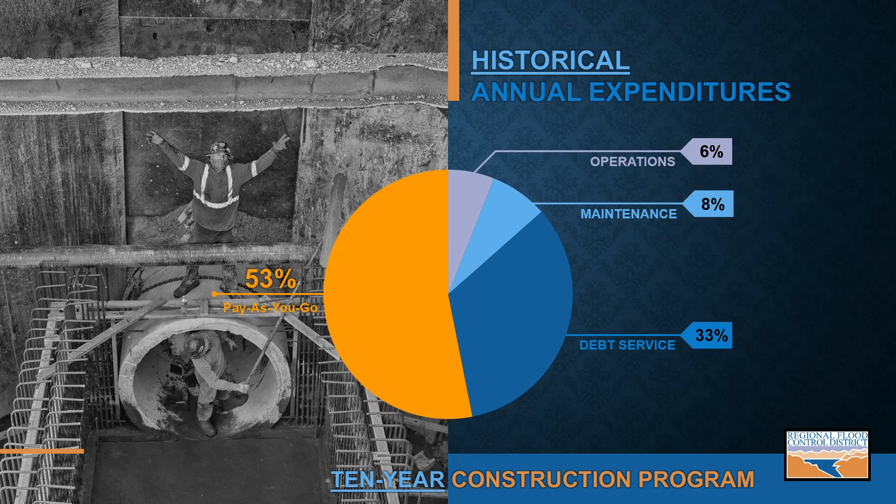I'll start with an overview of the district finances and 10-year construction program. Revenues are obtained from 1/4 of 1% sales tax revenue, interest revenues, and bond proceeds from the issuance of debt. This slide shows historic annual expenditures for the district. Note that operating costs are kept low at about 6%, shown in the upper right of the chart. The remaining 94% of resources are spent on design, construction, and maintenance of regional facilities.

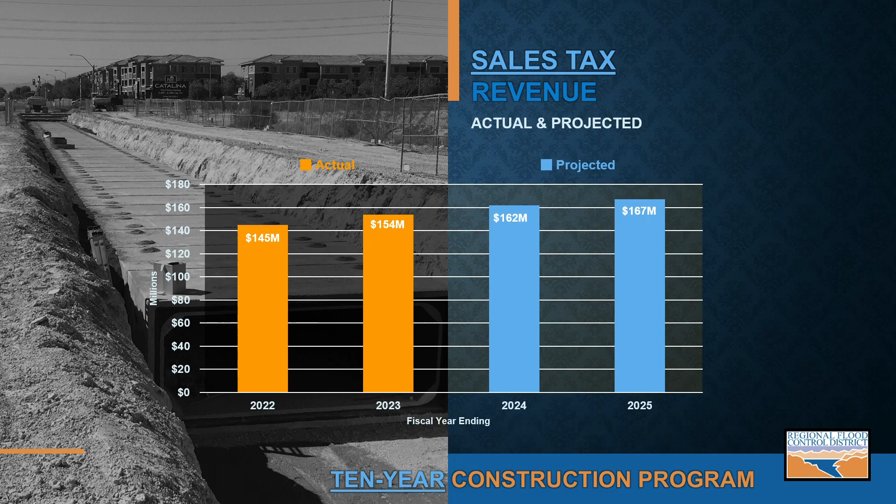These are actual and projected sales tax revenue from fiscal year 2022 and forward. The orange bars represent actual sales tax revenue for fiscal years 2022 and 2023. The blue bars represent projected revenues of about $162 million for fiscal year 2024 and $167 million for fiscal year 2025, which is a 3.3% increase over the 2024 revised estimate.

This graph represents the total estimated resources for the upcoming 10-year period. The orange bars represent the pay-as-you-go funding, or the resources available after district obligations have been met. These funds go to the capital improvement program. The blue bars represent anticipated bonds of $100 million in each of years 2, 5, and 8. These estimates were used to program projects in the 10-year plan. The total resources, including bonding and pay-as-you-go funds, are approximately $1.1 billion.

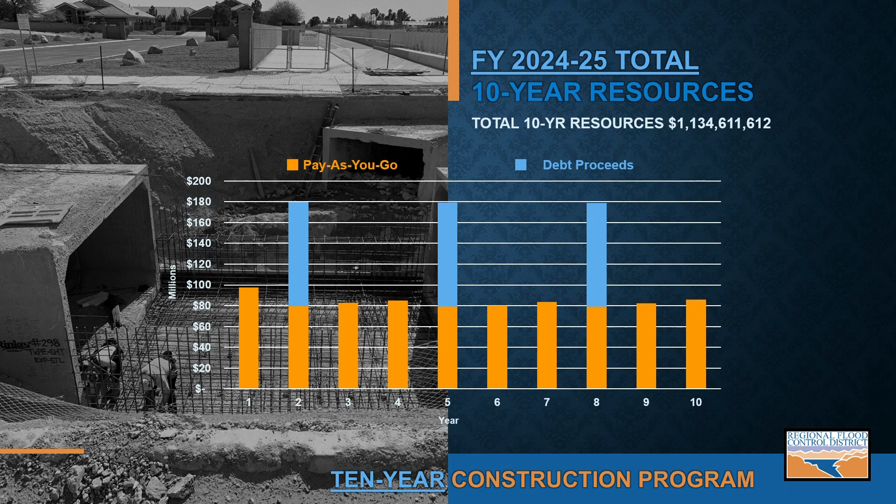This chart shows the prorated share of funding that each entity receives to program against. Percentages are calculated based on the dollar amount of remaining facilities to be built in each respective area compared to the total dollar amount of all remaining facilities left to be built in the master plan. We update these percentages every 5 years with the Las Vegas Valley Master Plan Update, or MPU. The 2023 MPU was adopted this past April. Therefore, these percentages are effective for the next 5 years.

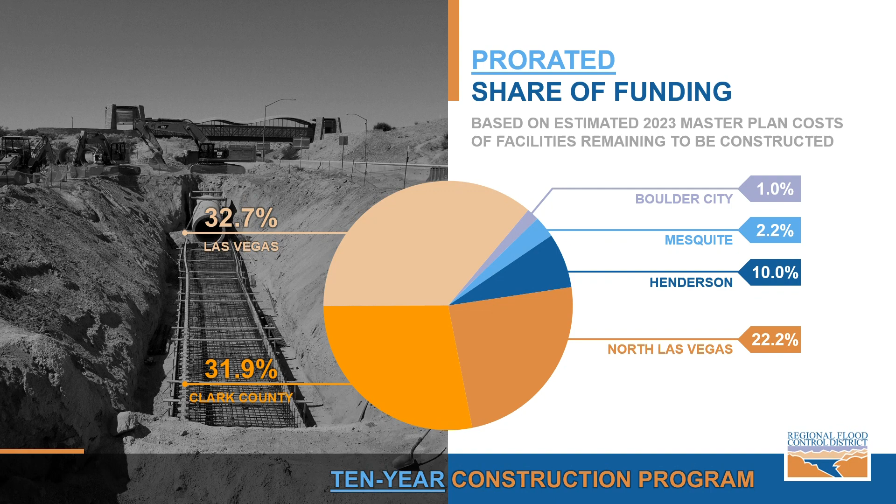Can we ask you a quick question because it's coming up? This is based on the basins, not on the actual jurisdictions. The hydrographic basins, yeah, so that's why.

Okay, so during annual review and development of the 10-year plan. Sorry, Mayor Goodman has a question for you.

Do we have a schedule of bond payments, when they're satisfied, that we could see when they terminate and what projects they were allocated for? Yes, we do, it's right here. We track all of our bonds and what projects are funded with all those bond proceeds, so we can certainly provide that to you. I think that would be interesting, what's sunsetting, when we've paid it, and at what amount, what becomes available then for future projects. I think at some point it would be on a regular basis, doesn't have to be consistent. Thank you.

This slide shows our project prioritization criteria, which we review during development of the 10-year construction program. The 4 criteria on the left are weighted heavier in the prioritization matrix. The first 2 listed, population affected and assessed land value impacted, are the most important for protection of life and property, and safety too.

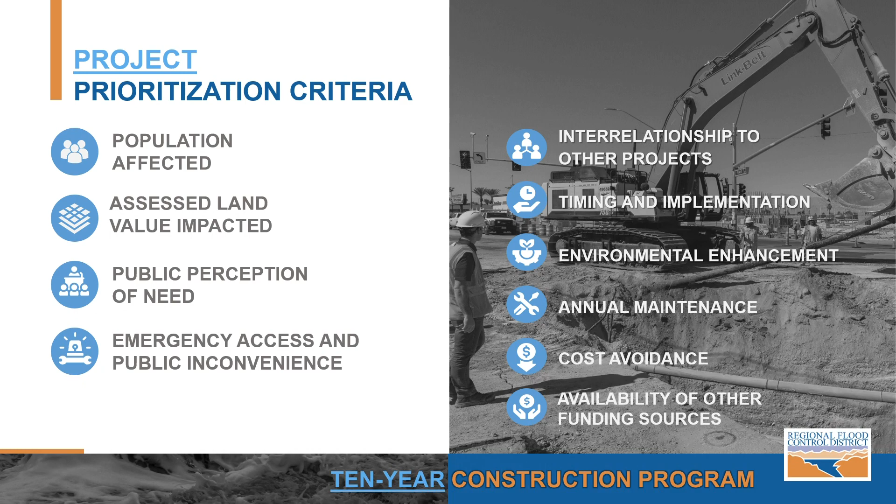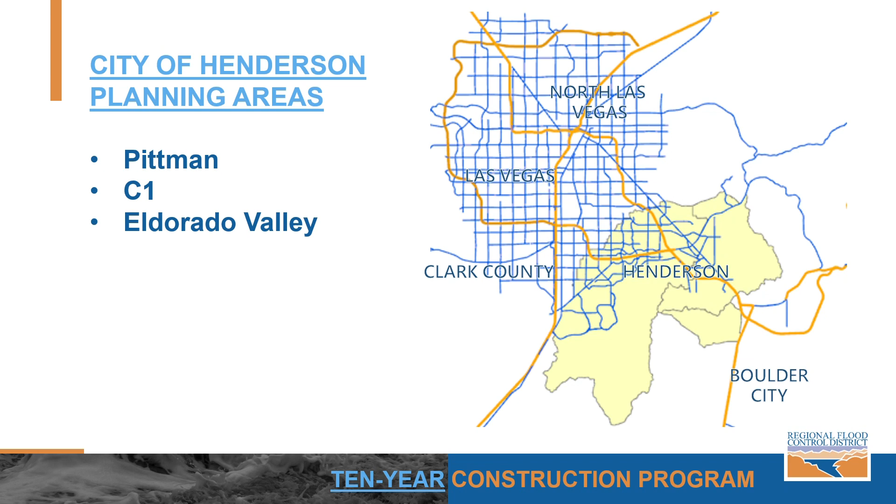The next group of slides highlight first-year eligible projects on the 10-year plan. A project is first-year eligible if it's programmed for construction in the first 3 years of the plan. The Pittman, C1, and Eldorado Valley planning areas are managed by the City of Henderson. Eldorado Valley was recently annexed to the City of Henderson and is located adjacent to Boulder City.

This map shows the Pittman planning area. The legend in the upper right corner shows existing or funded for construction facilities in dark or light blue, proposed 10-year plan facilities in red, and facilities beyond the 10-year plan in green. First-year eligible projects are indicated with a red oval. There are 2 first-year eligible projects in the Pittman planning area, both part of the Pittman Burns system.

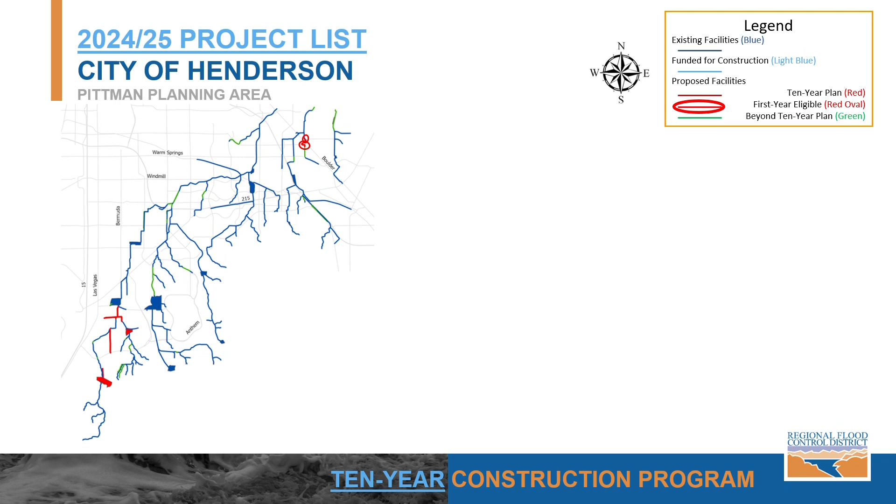The Pittman Sunset Burns to Foster Phase 3 project consists of concrete box storm drain in Sunset Road from Phase 2 to Merlane Drive, then south in Merlane Drive to Foster Avenue.

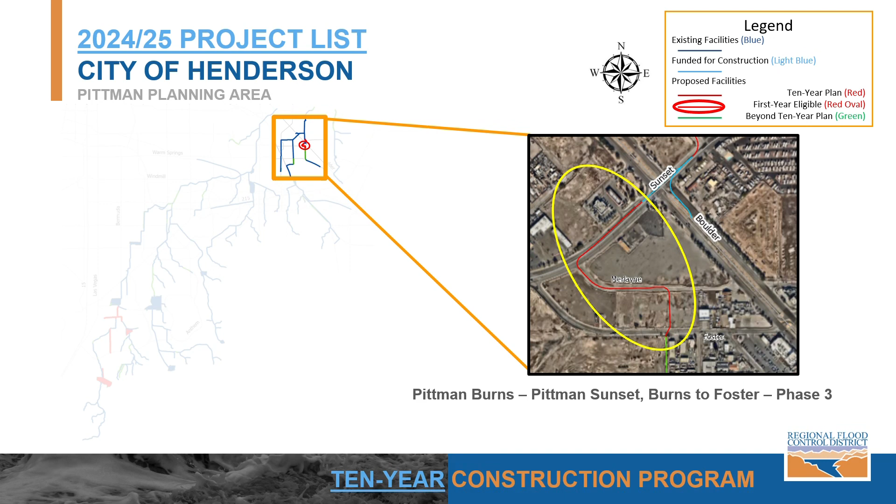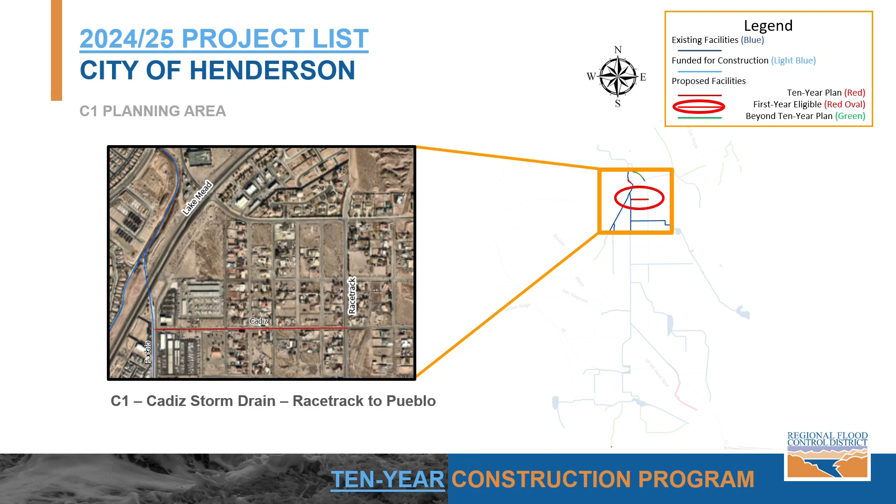The City of Henderson has 3 first-year eligible construction projects totaling about $11 million, and a 10-year plan total of about $89 million.

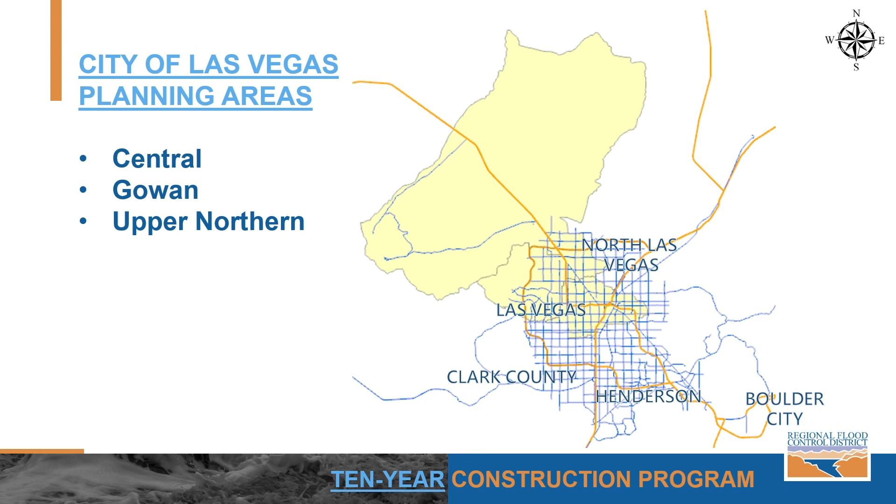The City of Las Vegas manages the Central, Gowan, and Upper Northern planning areas. 4 projects are first-year eligible in the Central planning area.

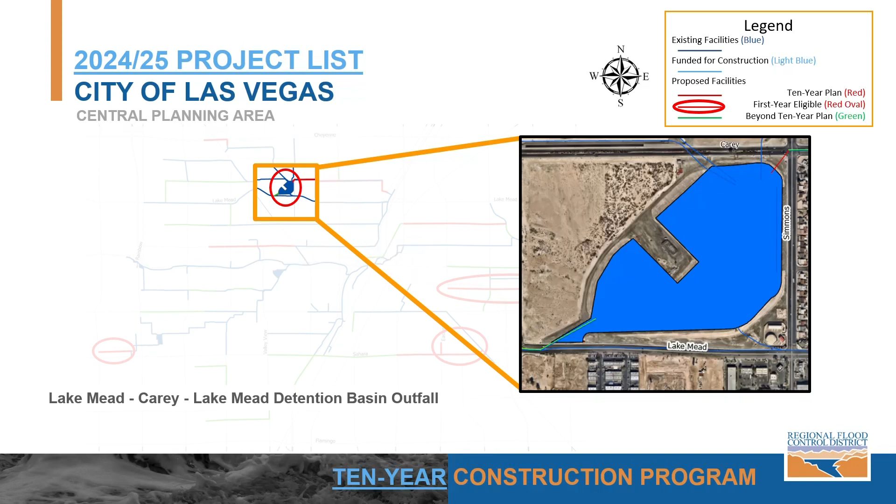The Carey Lake Mead Detention Basin Outfall Project consists of a 48-inch diameter concrete pipe outlet from the detention basin connecting to existing storm drain in Carey Avenue. The project will also include a water quality facility retrofit. This project is being managed by the City of Las Vegas.

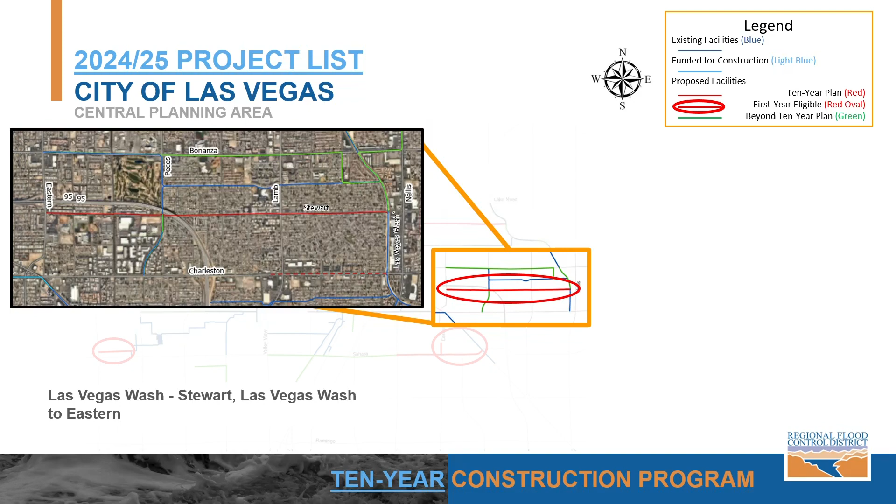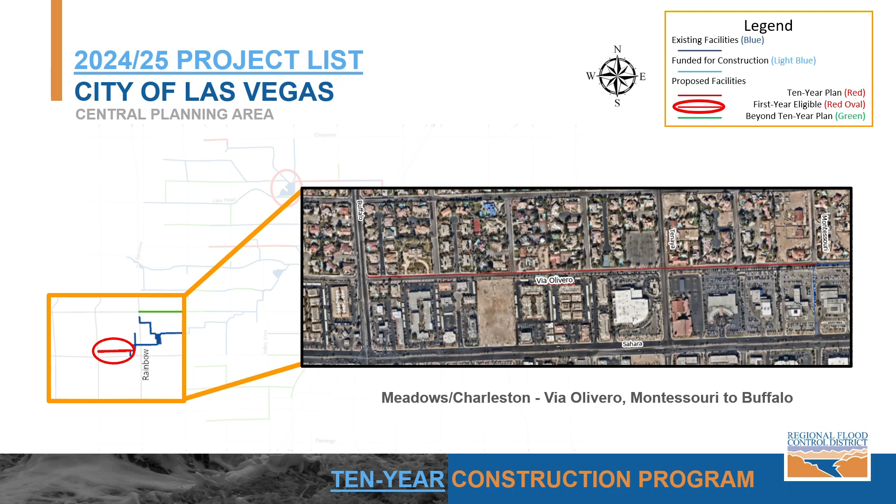The Via Olivero storm drain project includes 7x7 and 8x7 concrete box storm drain in Via Olivero Avenue from Montessouri Street to Buffalo Drive.

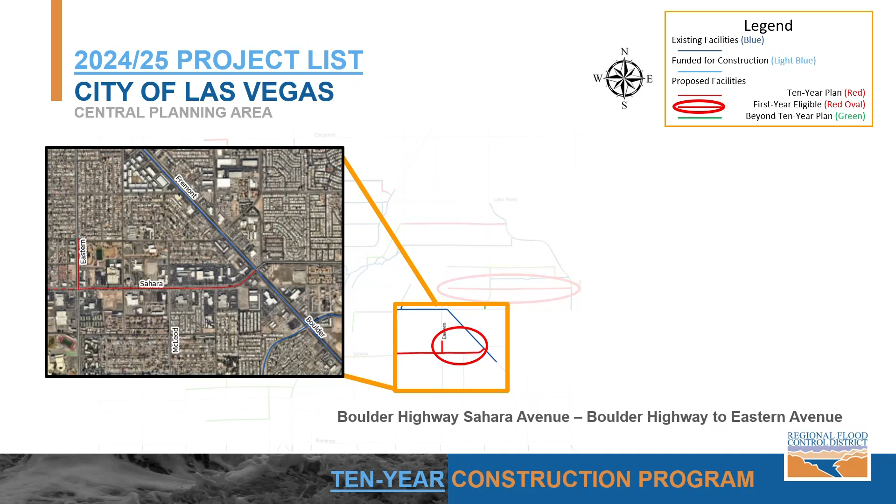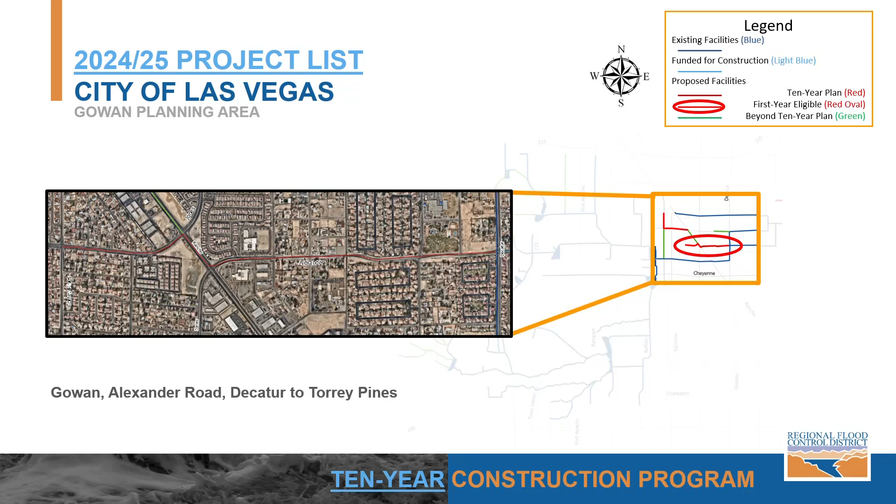In the Gowan planning area, there is one first-year eligible project: the Gowan-Alexander Road, Decatur to Torrey Pines project, a combined RFCD, RTC project that includes concrete box storm drain in Alexander Road from Decatur Boulevard to Torrey Pines Drive.

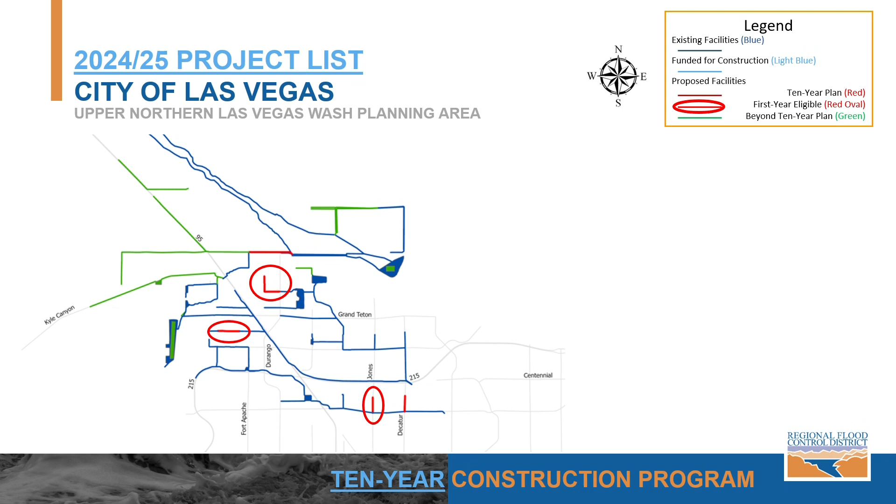In the Upper Northern Las Vegas Wash planning area, there are 3 first-year eligible projects. The Ann Road Channel West project consists of 10 by 4 concrete box storm drain in Jones Boulevard from Ann Road to Tropical Parkway.

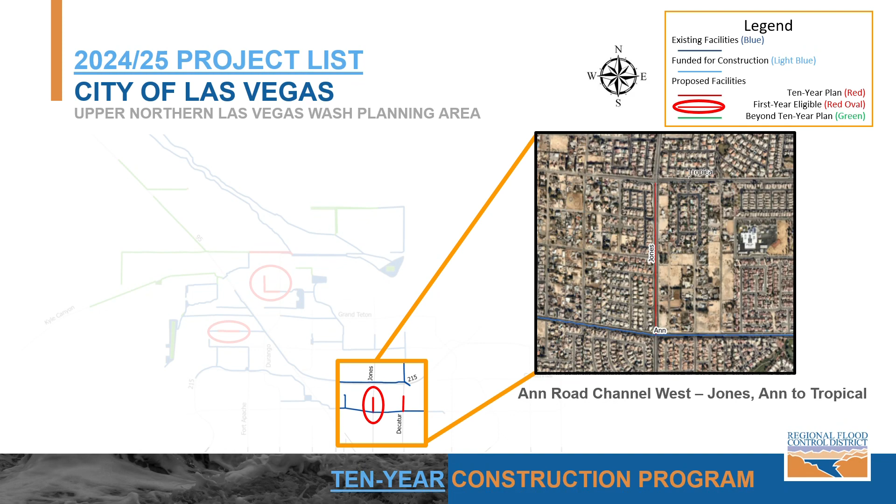Next, we have the Brent Drainage System Durango to O'Hare project, which consists of 8 by 7 concrete box storm drain in Brent Lane from Durango to El Capitan, and 10 by 7 to 9 by 6 concrete box storm drain in El Capitan to O'Hare.

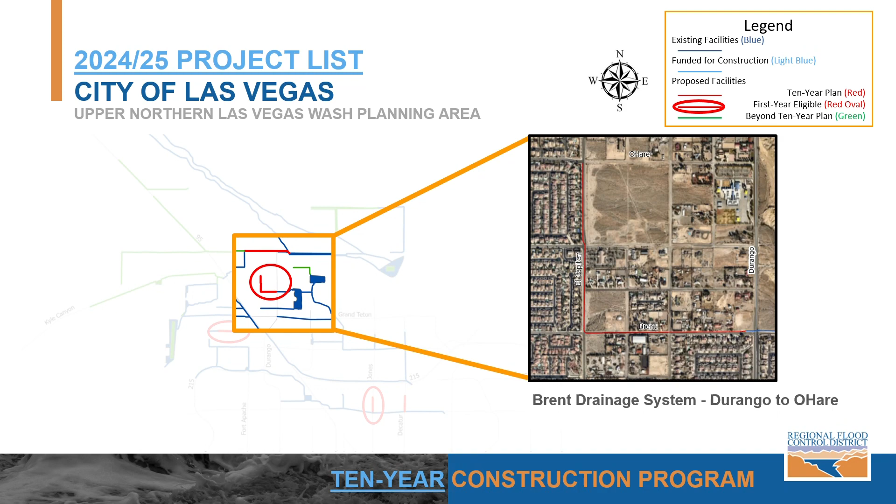And the Centennial Parkway Channel West Farm Road project consists of 7 by 6 concrete box storm drain in Farm Road from Tee Pee Lane to Hualapai Way.

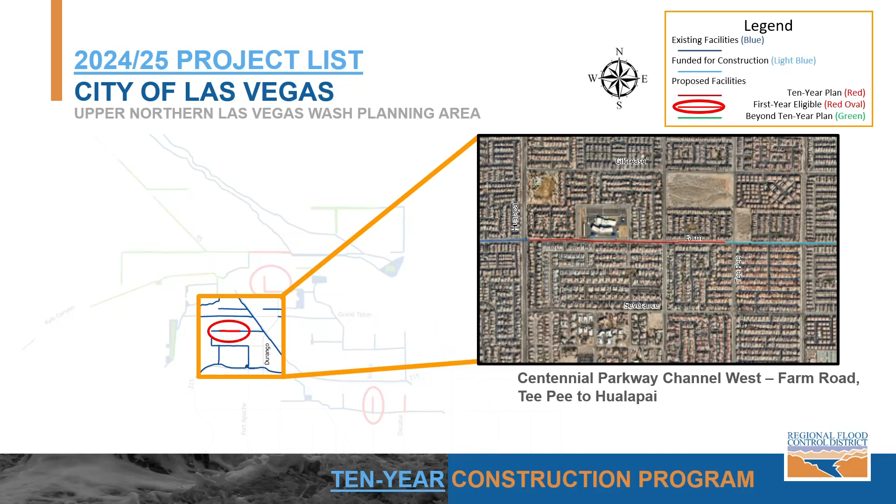The City of Las Vegas has 6 construction projects and 2 design projects that are first-year eligible, totaling about $112 million, and a 10-year plan total of about $364 million.

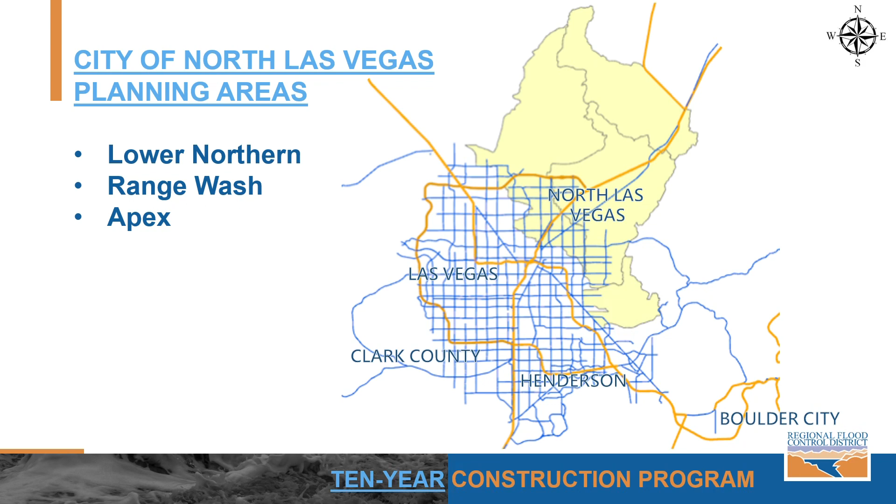The Lower Northern, Range Wash, and Apex planning areas are managed by the City of Las Vegas. There are 4 projects that are first-year eligible in the Lower Northern Las Vegas Wash planning area.

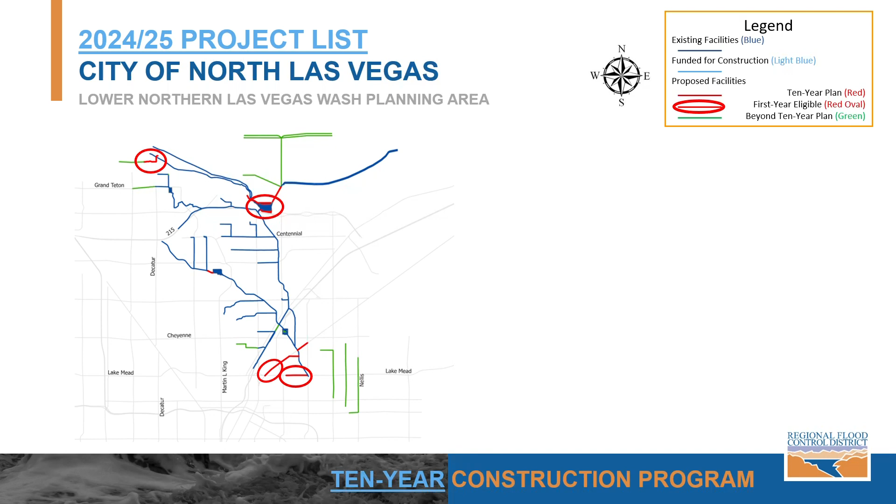The North Las Vegas Detention Basin upgrade includes a 960 acre-foot detention basin expansion, a new spillway, and upgraded inflow and outflow facilities. The project is located north of the 215 Beltway between 5th Street and Losee Road.

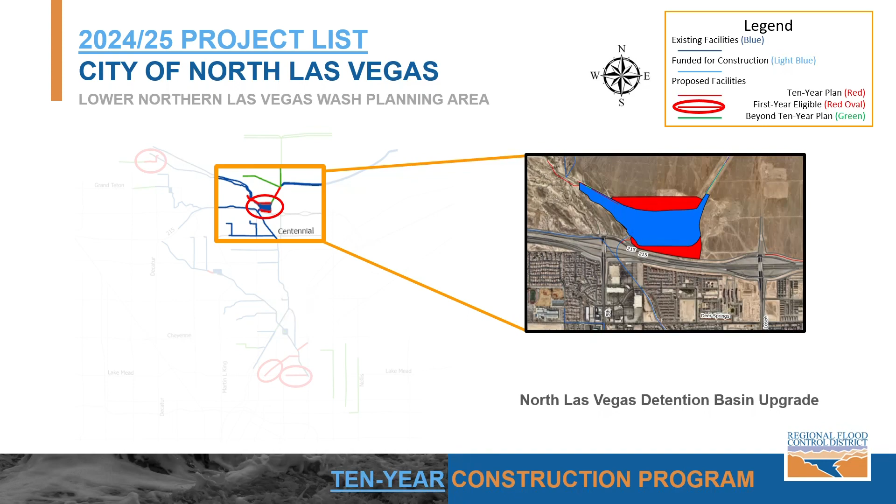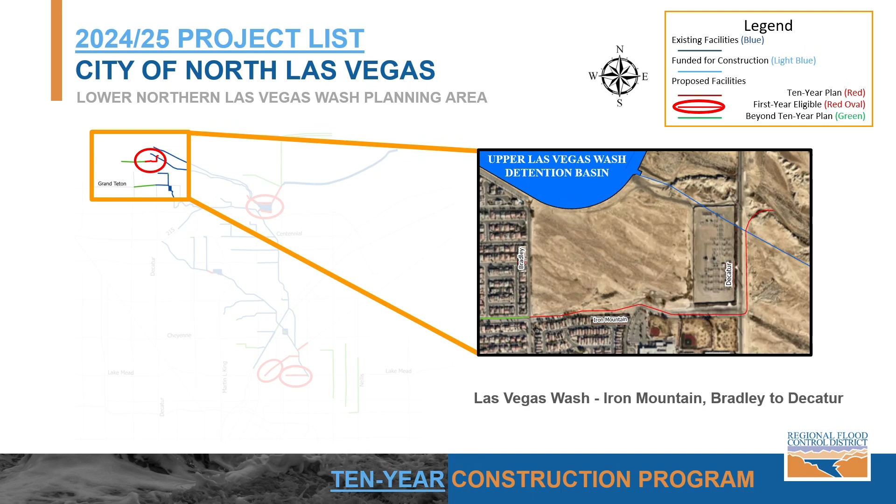In the northwest is the Las Vegas Wash Iron Mountain project, which is combined with a City of Las Vegas roadway project in Iron Mountain Road. Storm drain is proposed in Decatur Boulevard from the upper Las Vegas Wash to Iron Mountain Road, then in Iron Mountain Road from Decatur to Bradley. This project is being managed by the City of Las Vegas.

The Lake Mead Storm Drain project includes 7 by 6 to 10 by 6 concrete box storm drain in Lake Mead Boulevard from the Las Vegas Wash Middle Branch at Pecos Road to just east of Civic Center Drive.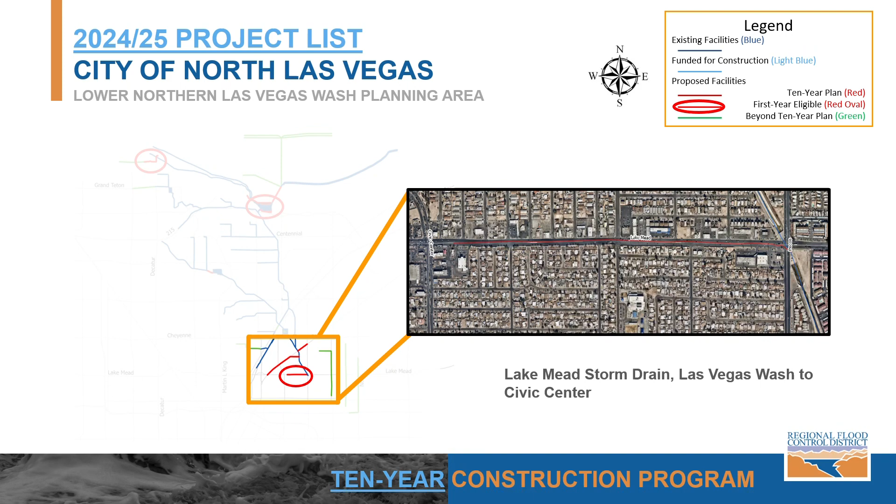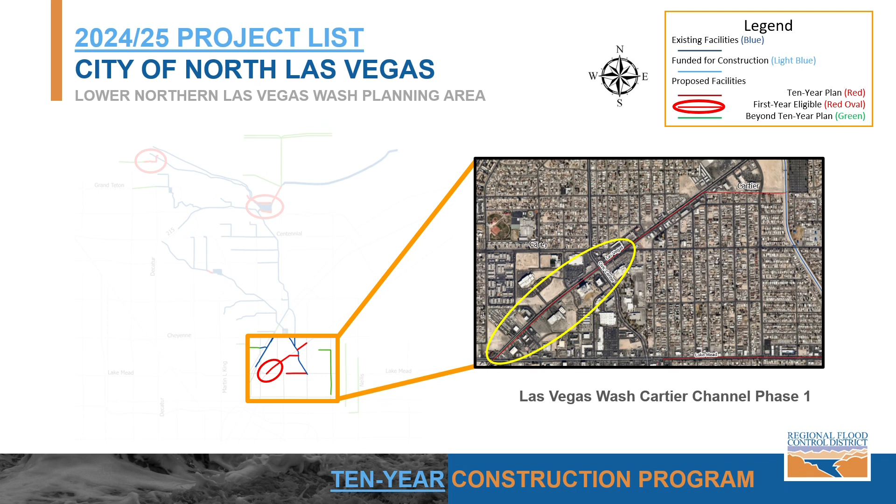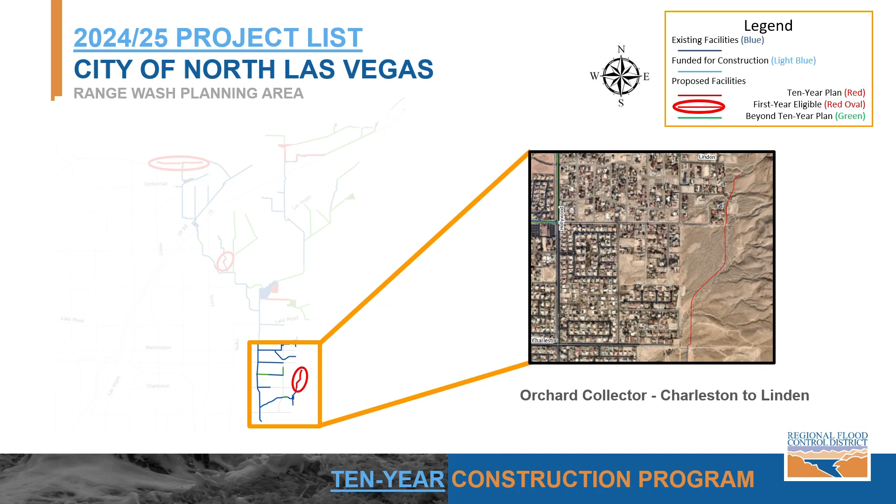3 projects are first-year eligible in the Range Wash planning area. The Orchard Collector consists of a soil cement lined levee that extends south from the Linden Avenue alignment to Charleston Boulevard along the base of Sunrise Mountain. This facility collects runoff from the east and conveys it south to the Orchard Detention Basin. This project is being managed by Clark County.

Next is the Range Wash Beltway Conveyance and Collection System at Pecos. This project consists of concrete channel and concrete box storm drain along the 215 Beltway between Losee Road and Lamb Boulevard and connects to existing facilities in Pecos Road.

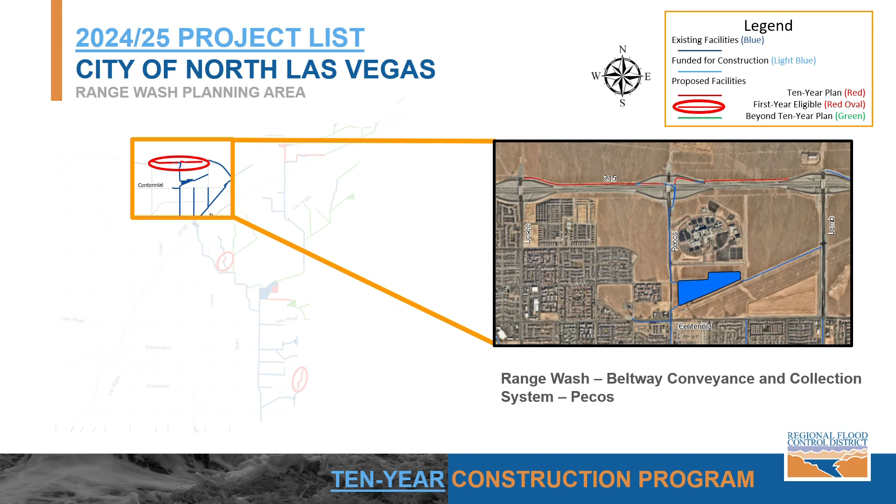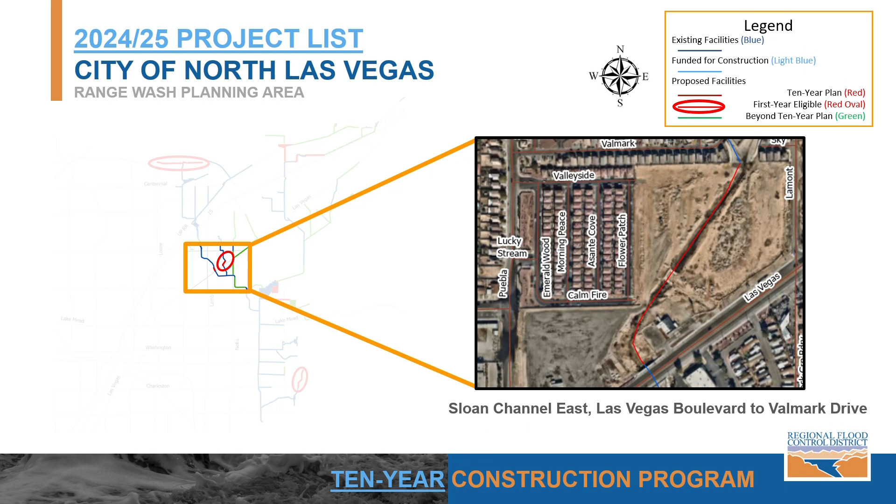The Sloan Channel East Branch project consists of concrete channels across privately owned parcels between Las Vegas Boulevard and Valmark Drive. The proposed channels connect to existing facilities upstream and downstream. This project is being managed by Clark County.

The City of North Las Vegas has 7 construction projects that are first-year eligible, totaling about $105 million, and a 10-year plan total of about $296 million.

Clark County manages the Tropicana Flamingo, Duck Creek Blue Diamond, and the Clark County outlying planning areas. There are 8 first-year eligible projects in the Tropicana Flamingo planning area.

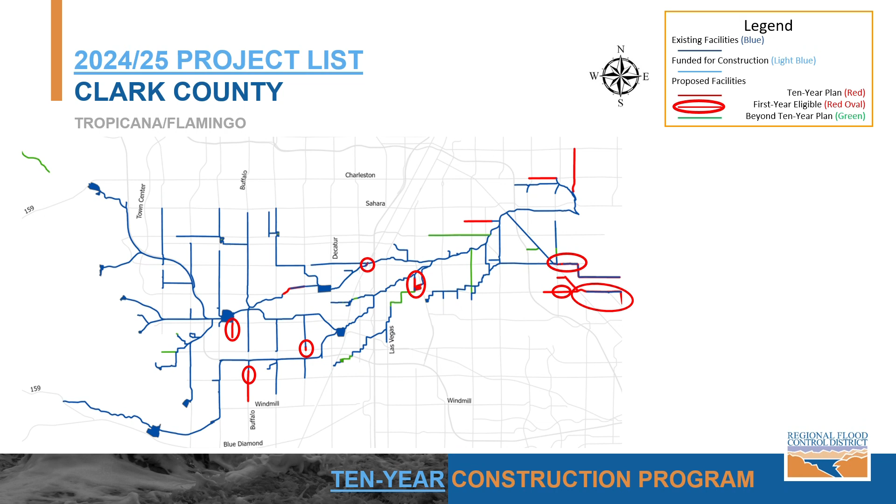First, we have the Blue Diamond Buffalo Branch project, which includes 10 by 8 concrete box storm drain in Buffalo Drive from Badura Avenue to Warm Springs Road.

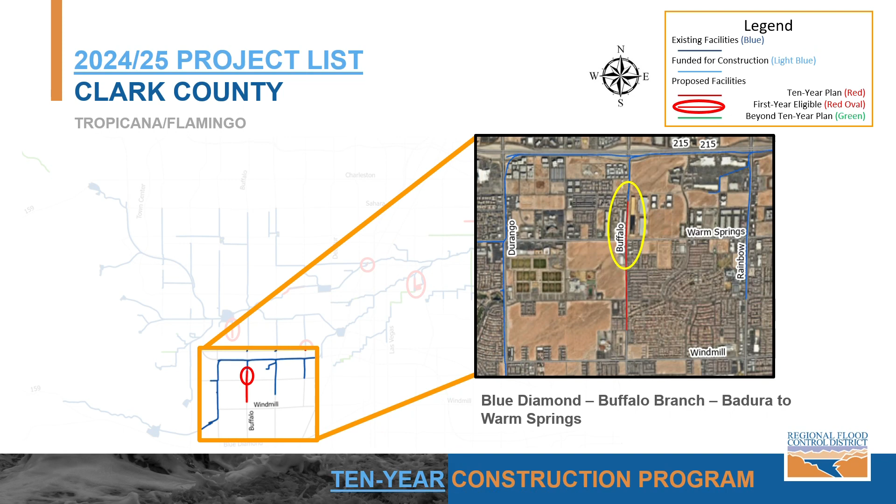The Flamingo Cimarron Branch project includes concrete channels along a corridor just west of Cimarron Road between Russell Road and Patrick Lane. Once complete, the facility will collect and convey runoff from Patrick Lane to the Flamingo Detention Basin.

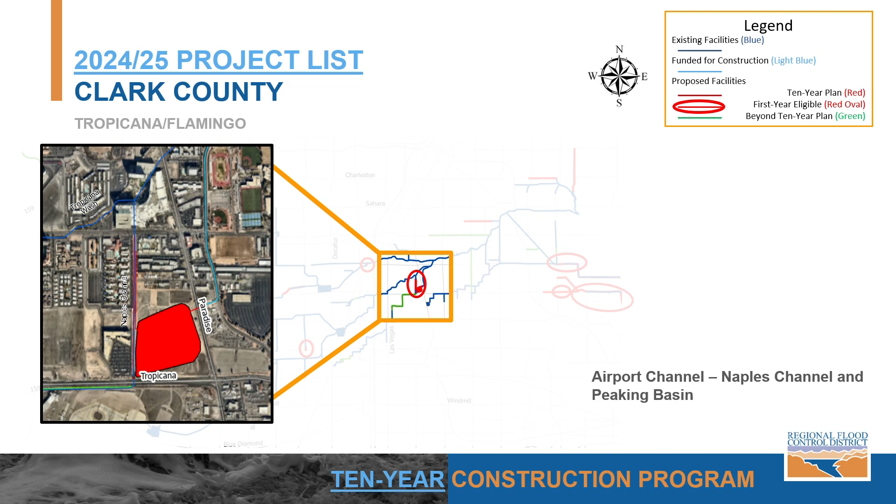The Airport Naples Channel and Peaking Basin project replaces the existing unlined Naples Channel between Harmon and Tropicana with a 15 by 5 concrete box storm drain. A 220 acre-foot Peaking Basin and 2 outlet facilities are proposed to tie into downstream facilities.

Next on the Flamingo Wash is a small project that consists of 20-foot wide, 6 to 8 foot deep rock line channel in the Flamingo Wash between the UPRR and Hotel Rio Drive.

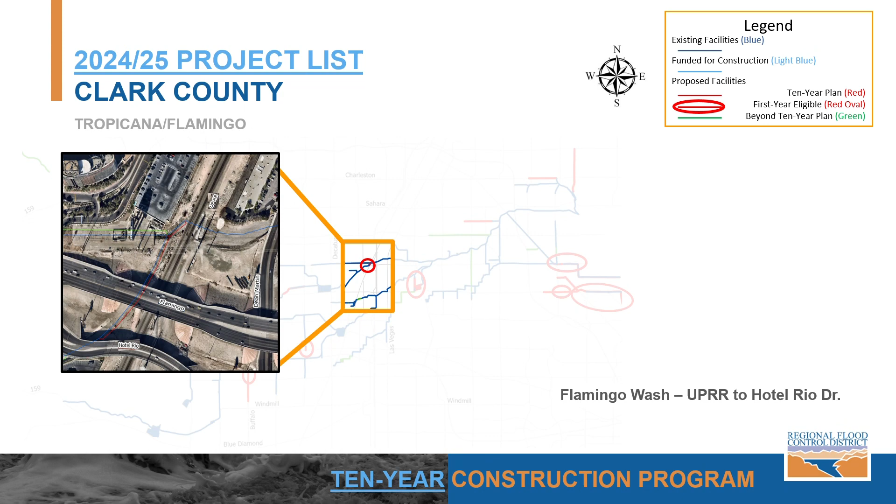The Flamingo Diversion Jones project consists of 78-inch concrete pipe storm drain in Jones Boulevard from Tico Road to Sunset Road.

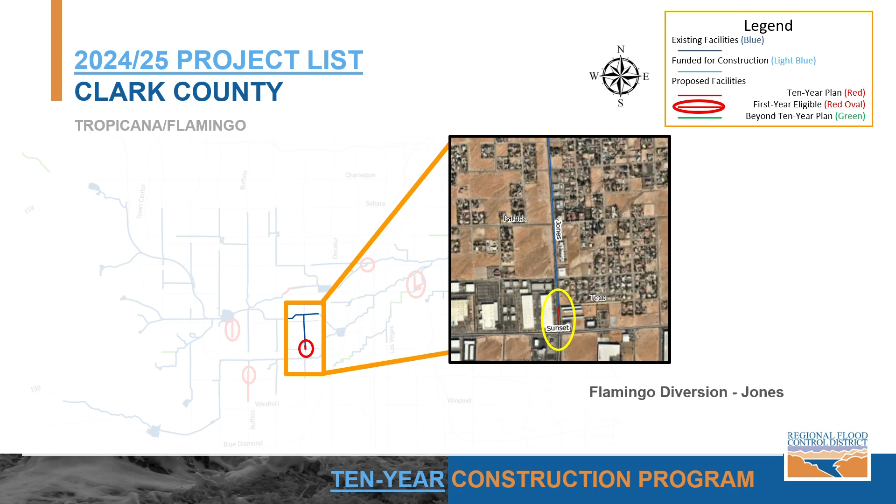And to the east, we have the Tropicana Avenue Conveyance project, which consists of earth channel and concrete box storm drain along the west boundary of the Wetlands Park and concrete box storm drain in Tropicana Avenue from the Wetlands Park to Andover Drive.

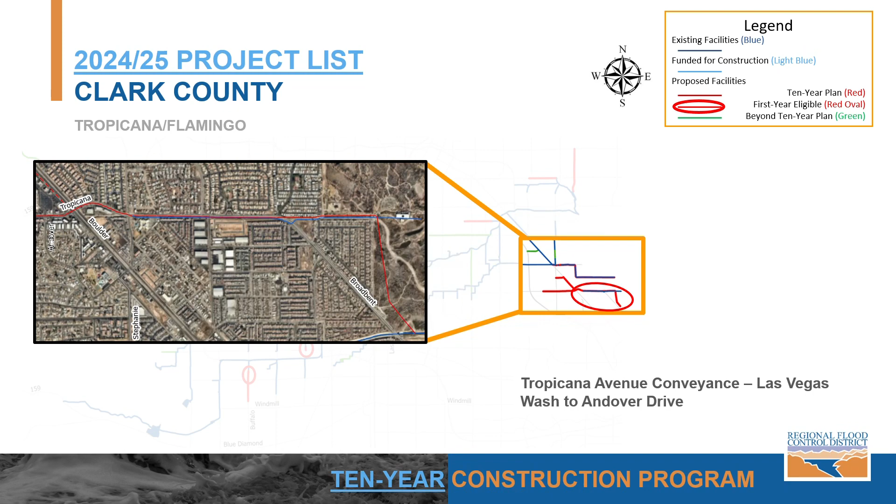The second phase of the Tropicana Avenue Conveyance project, located upstream and to the west, consists of 10 by 7 concrete box storm drain in Tropicana Avenue from Andover Drive to Morris Street.

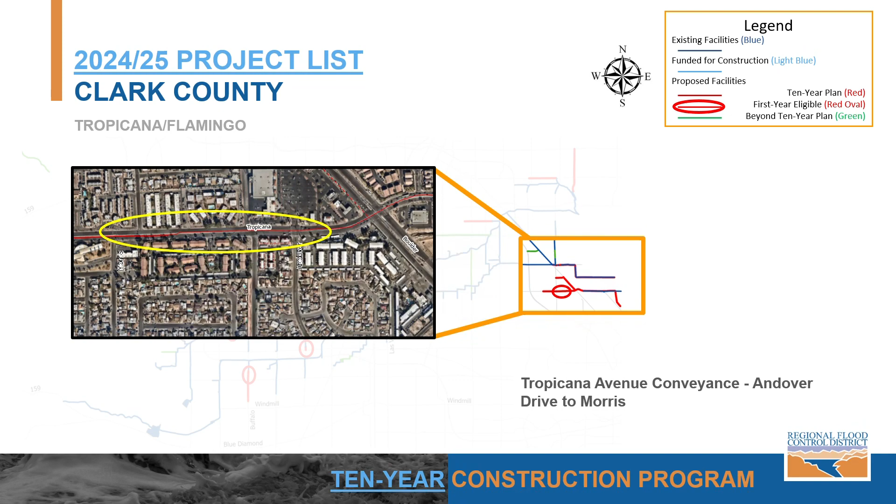And to the north, the Las Vegas Wash Monson Channel project replaces existing channels and bridge structures along Flamingo Road between Jimmy Durante and Nellis Boulevard and adds a parallel facility in Flamingo Road from Nellis to Boulder Highway.

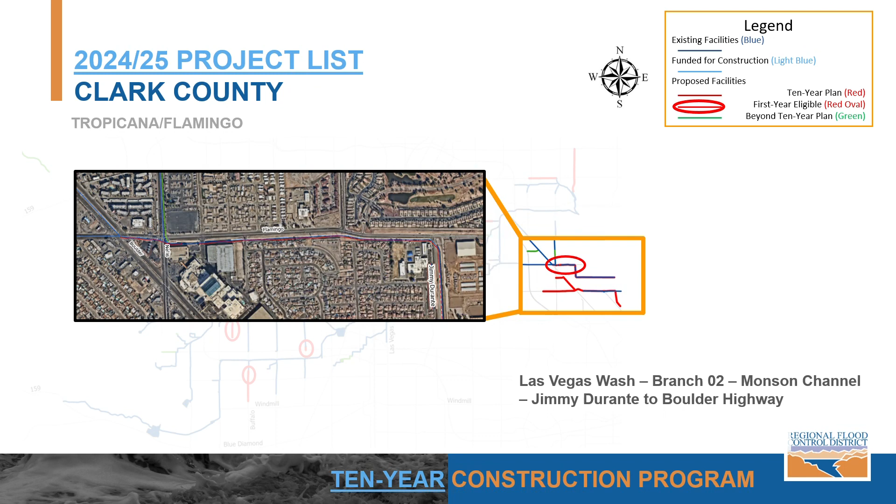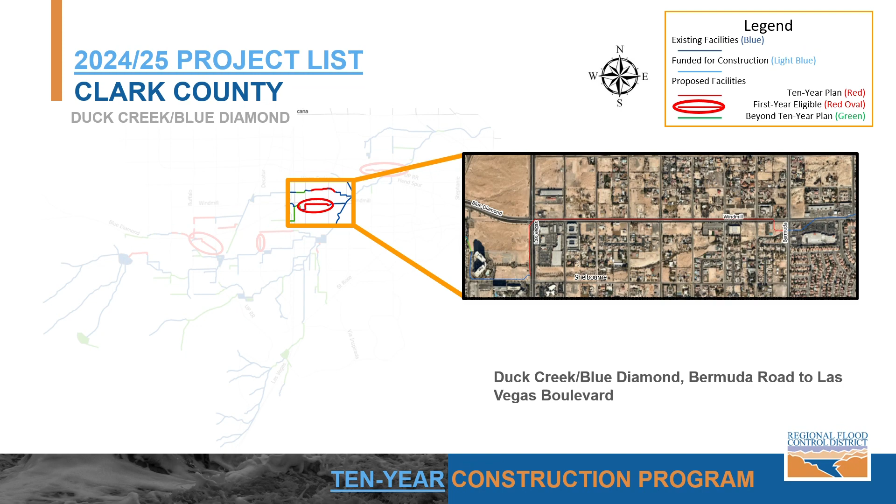Moving south to the Duck Creek Blue Diamond planning area, there are 5 first-year eligible projects. The Duck Creek Blue Diamond Bermuda to Las Vegas Boulevard project includes concrete channel and concrete box storm drain along Windmill Lane from Bermuda Road to Las Vegas Boulevard and in Las Vegas Boulevard south to Shelbourne Avenue.

Just north is the Blue Diamond Channel Amigo to Haven project, which includes approximately 1 mile of concrete box storm drain in the Blue Diamond Wash between Amigo Street and Rancho Destino Road, and concrete channel upstream to Haven Street.

The Blue Diamond Channel Decatur LeBaron to Serene Phase 2 project includes 10 by 6 and 9 by 6 concrete box storm drain in Decatur Boulevard from just north of Silverado Ranch Boulevard to Serene Avenue.

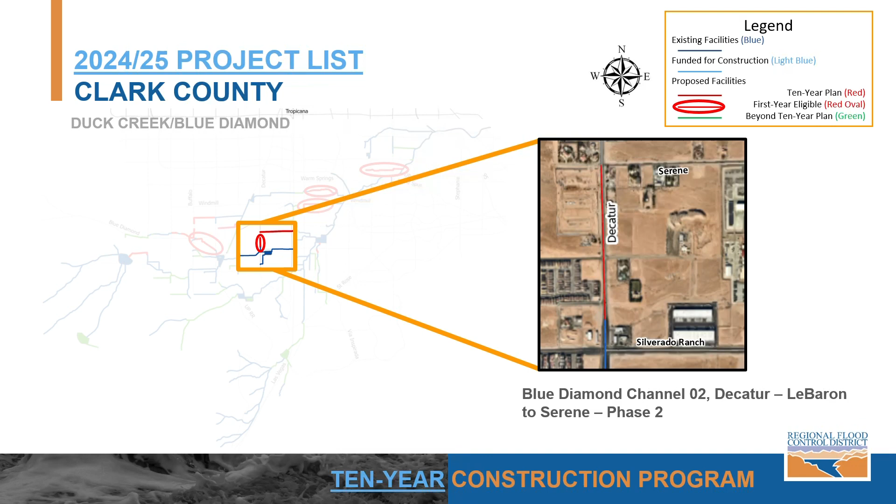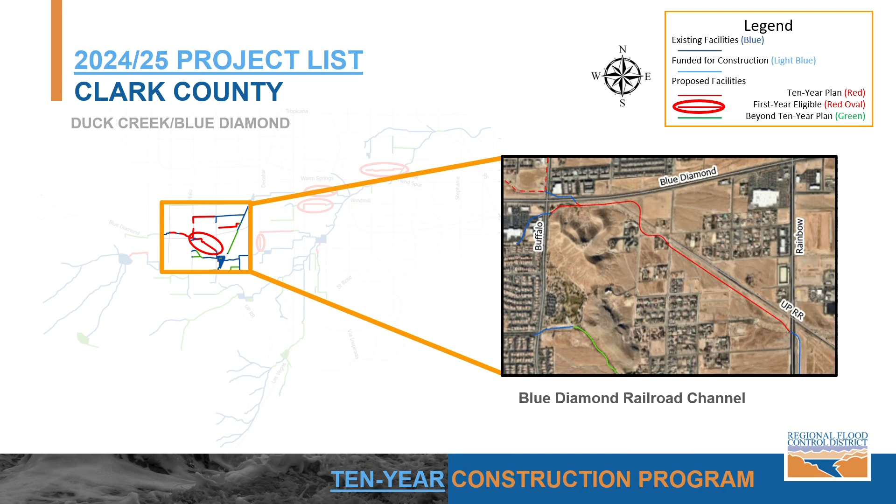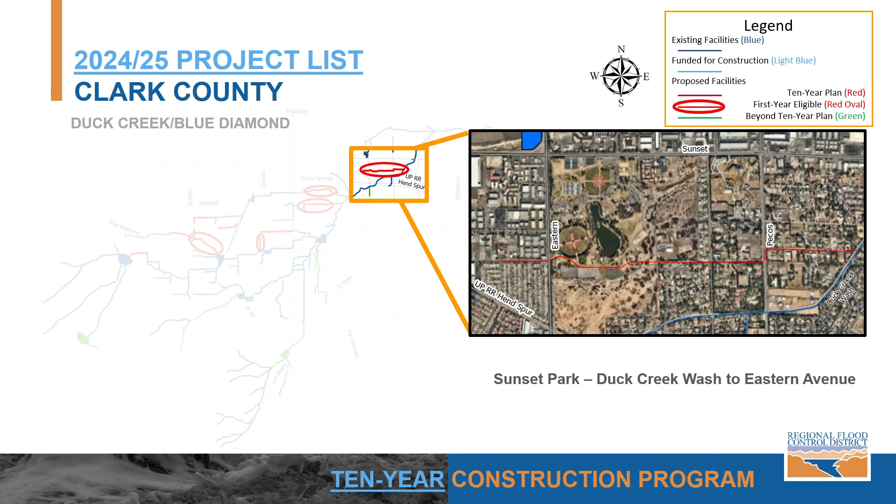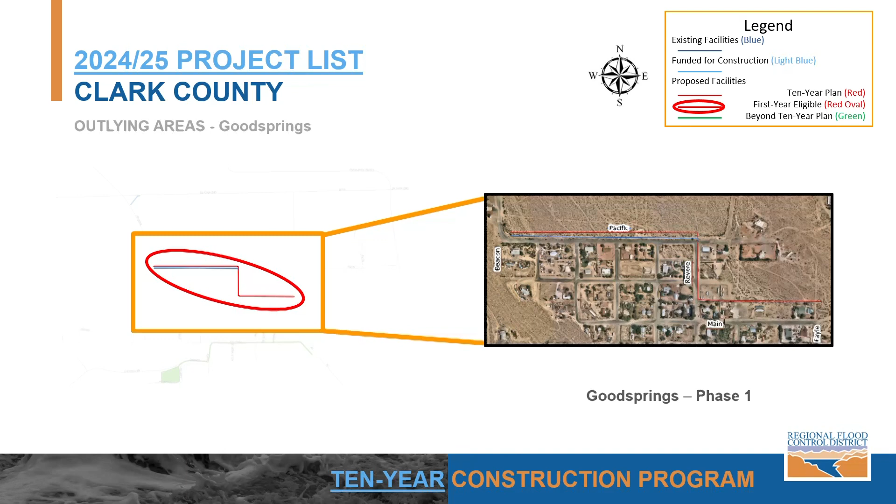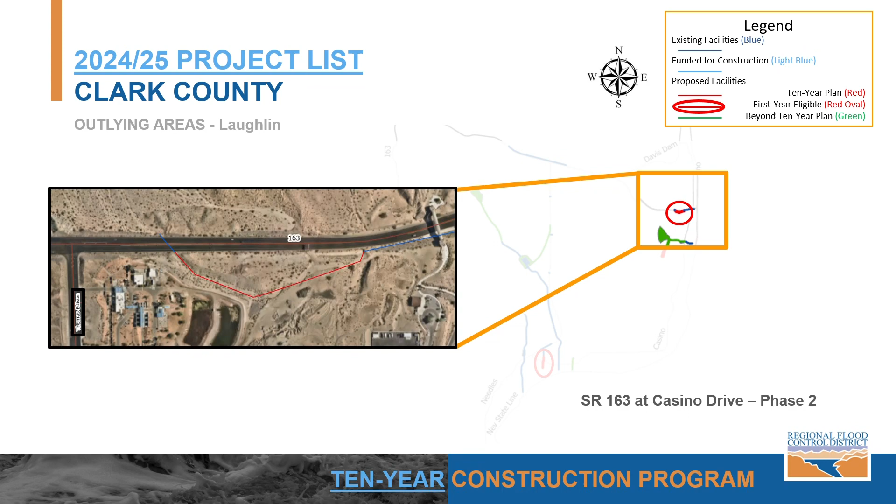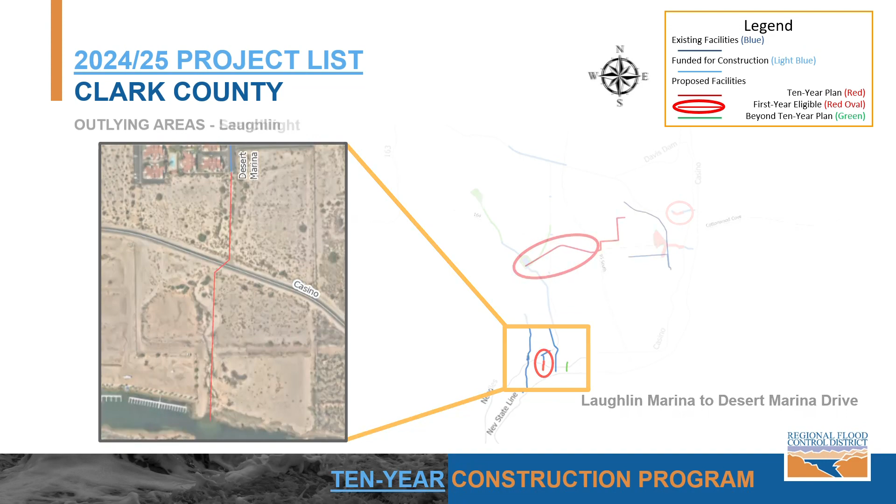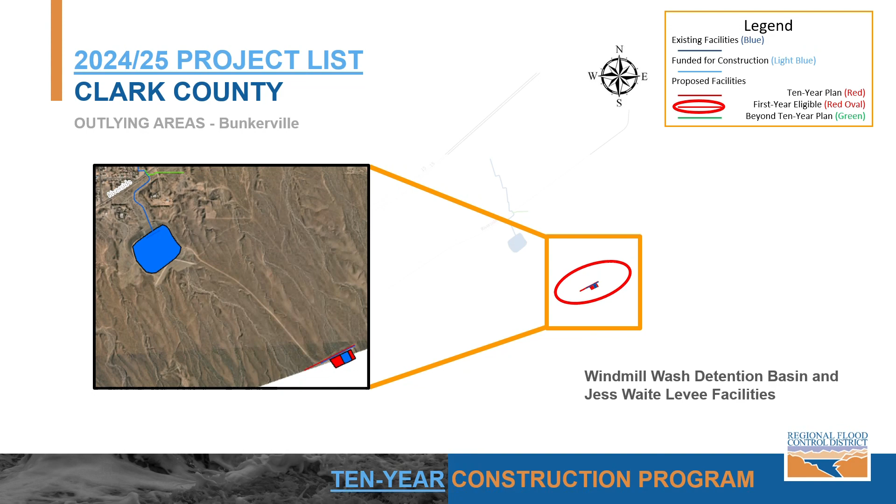And in Bunkerville, we have the Windmill Wash Detention Basin and Jess Waite Levee facilities, which includes upgrade to the existing Jess Waite Levee to direct upstream runoff to the existing Windmill Wash Detention Basin downstream.

Clark County has 14 construction projects and 4 design projects that are first-year eligible, totaling about $202 million, and a 10-year plan total of about $446 million.

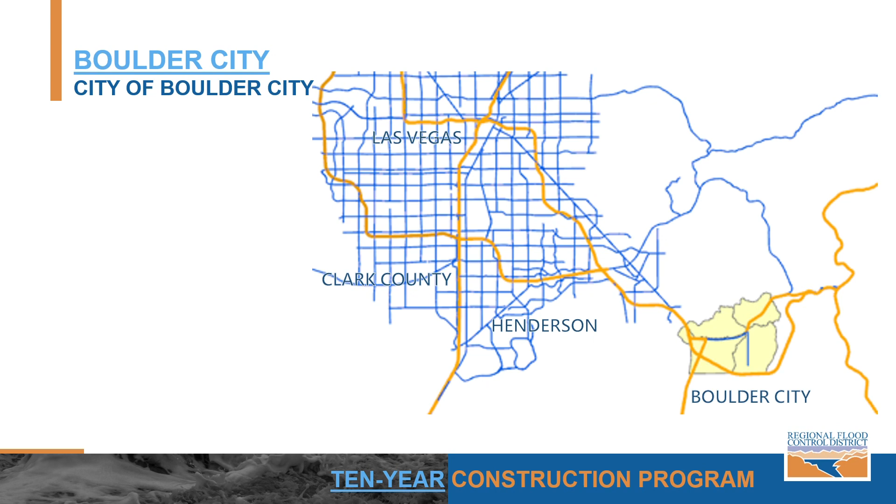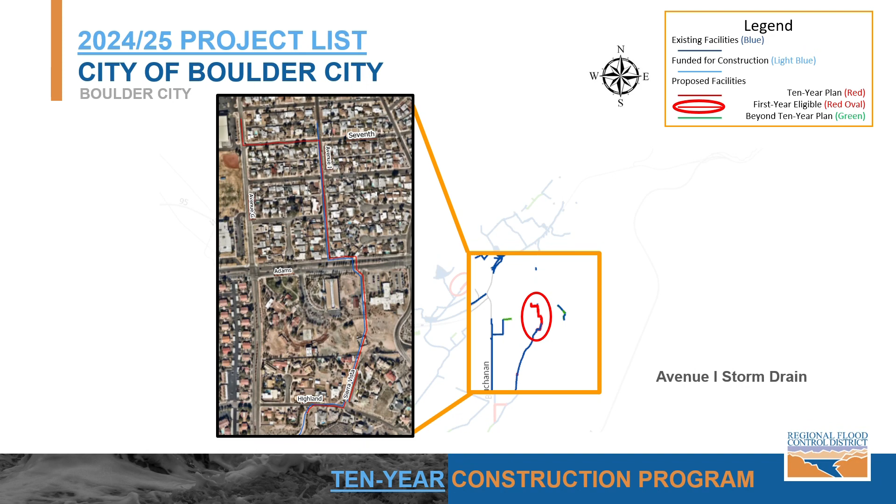Moving to Boulder City, Boulder City has 2 first-year eligible projects. The Avenue I project proposes storm drain in Sierra Vista Place and Avenue I from Highland Drive to 7th Street, then in 7th Street to Avenue G, then north in Avenue G to the Boulder City High School.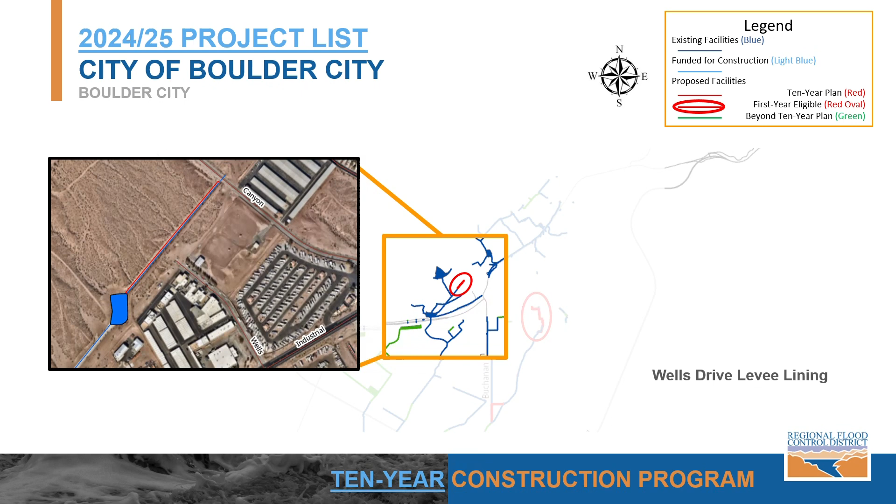The Wells Drive Levee lining project includes rock lining the existing Wells Drive Levee between an existing regional sediment basin and Canyon Road.

Boulder City has 2 construction projects that are first-year eligible, totaling about $5.4 million, and a 10-year plan total of about $9.7 million.

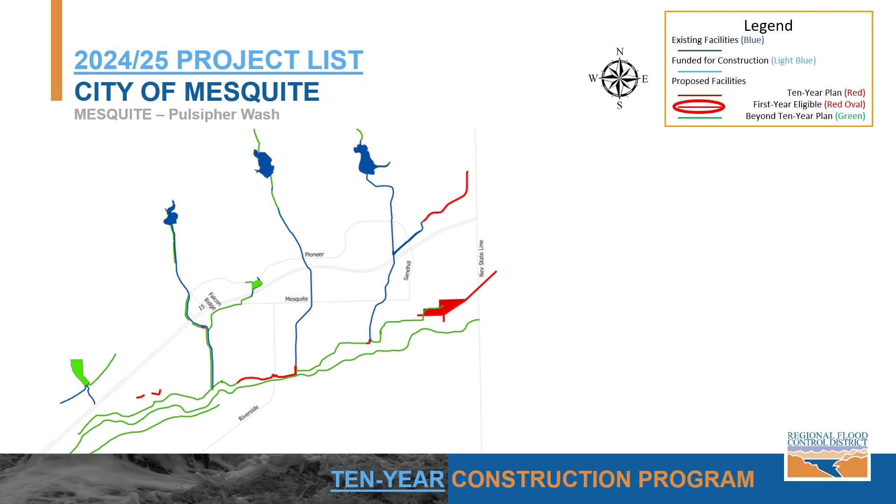And last but not least, the City of Mesquite has 2 first-year eligible projects. In the Pulsipher Wash planning area, the Leavitt Lane Crossing project includes triple 10x7 concrete box culverts that will be constructed as part of a roadway project that extends Leavitt Lane to the west.

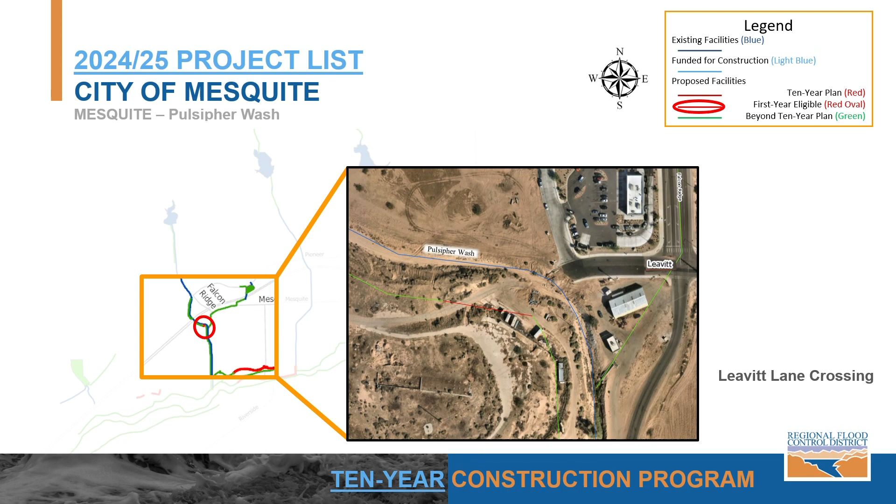And in the Virgin River planning area, the Virgin River Floodwall project includes approximately 4,800 linear feet of rockline levee along the Virgin River, extending northeast into Arizona, just beyond Old Mill Road. A 102-acre-foot detention basin and outfall pipe is proposed to drain upstream areas to the river. This project will offer flood protection to existing residential developments adjacent to the river.

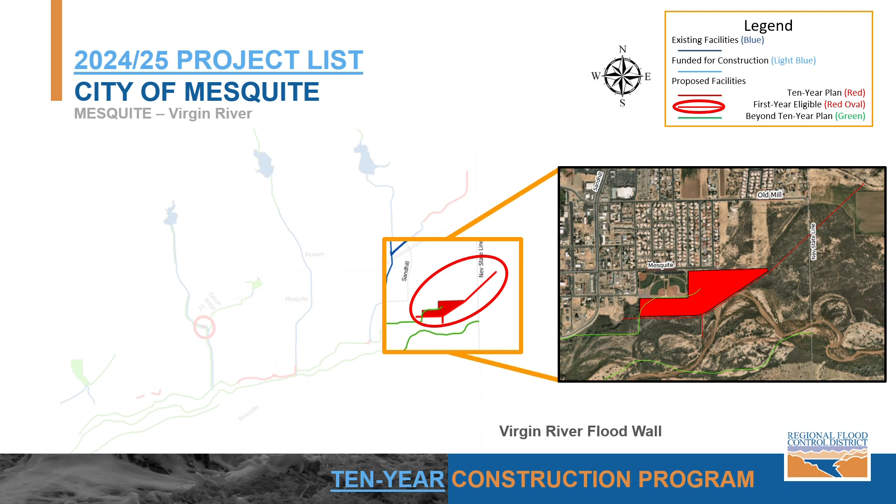The City of Mesquite has 2 construction projects that are first-year eligible, totaling about $11.4 million, and a 10-year plan total of about $22.6 million.

This is a summary of the 10-year construction program funding broken out by entity. Approximately $1.2 billion is programmed for the 10-year period.

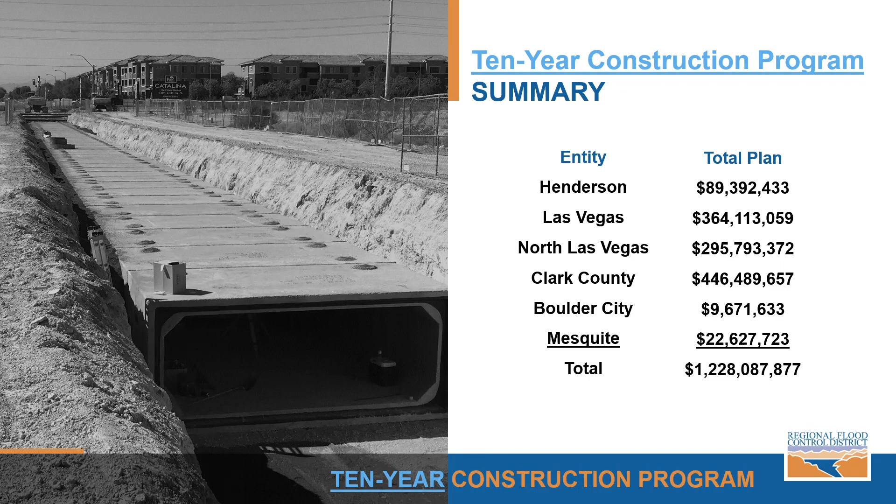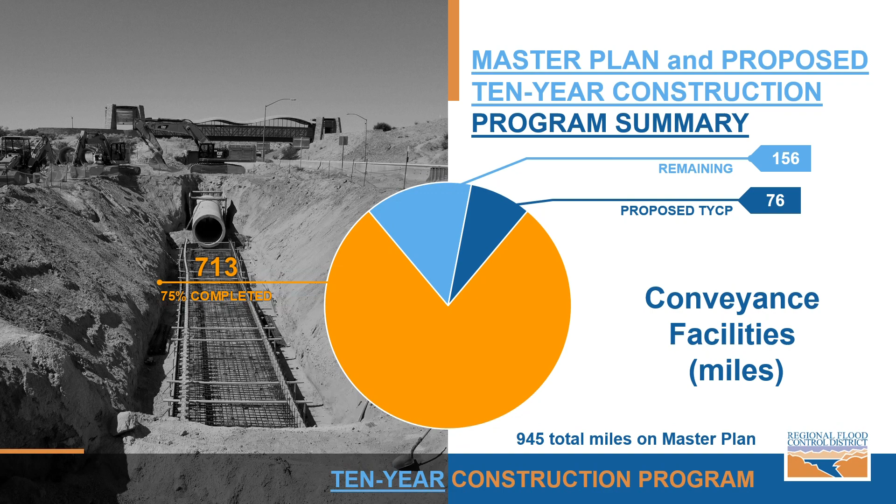This slide summarizes progress made on the master plan and the 10-year construction program. 713 miles of storm drain and channels are completed, which is about 75% of the total miles on the master plan. 76 miles of channel and storm drain are programmed in the 10-year construction program, and 156 miles remain beyond the 10 years.

110 detention basins are completed, or 73% of the total on the master plan. 7 detention basins are on the 10-year plan, and 33 basins remain beyond 10 years.

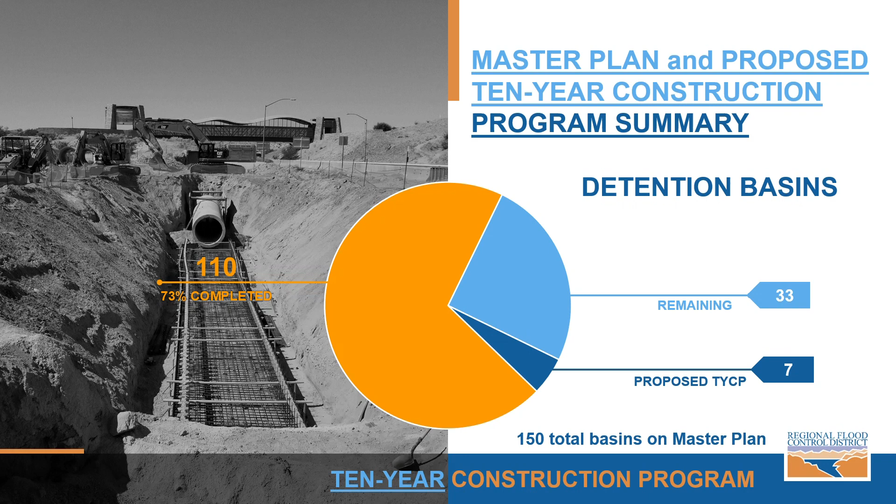And that concludes the presentation. Are there any questions? Thank you very much.

That was a great presentation. Any questions from the board? No. Thank you very much. That was great. Okay, thanks, Debbie.

If there's no questions, staff would recommend you adopt the prioritization of projects, 10-year construction program, and fiscal year 24-25 project list. Very good, I entertain that motion.

With a quick comment, I'd just like to say thank you very much for putting all the regional governments together, and I really appreciate the way the engineering teams work together very flawlessly. I think that, well, from us, or from my point, they look pretty flawless.

Congratulations, and with that, I'd like to make a motion to approve. All right, very good. There's a motion to adopt the prioritization of projects, 10-year construction program, and fiscal year 2024-25 project list.

And take any action deemed appropriate. All's in favor? Aye. Any opposed? Motion carries. Thank you.